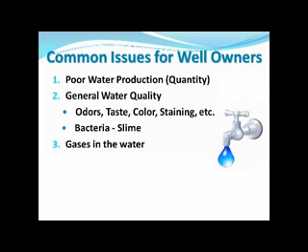Next is the quality of water produced, most noted by odors, taste, color, suspended sediment, hardness, etc. Bacteria issues are high on the list and are often related to your other water quality problems. Dissolved gases, such as carbon dioxide or methane, are much less common issues but can occur as well. You should know that no two wells are the same, including your well and your neighbor's.

Are you not getting enough water from your well to meet your needs? Does your well run dry when you put a lot of demands on it? Then you have a problem with what we call your water well's yield. Your well's yield is the rate that your well will produce water, generally expressed in gallons per minute or gallons per day. So, if I have a well that yields 1 gallon per minute and there are 1,400 minutes in a day, then I should get 1,400 gallons of water a day, right?

An average person uses about 75 gallons per day. A family of 4 would require about 300 gallons per day. So, 1,400 gallons per day should supply my average household just fine. However, the typical garden hose flows at a rate of about 5 gallons per minute.

So my 1 gallon per minute well will give me enough water for an average day, but it can't keep up if I'm watering the garden, taking a shower, or using more than one tap in the house at any given time. I need a well that does about 5 to 10 gallons per minute, or more, to keep up with typical household demand. If your well goes dry when you're using it a lot, then you have a problem with your well's yield rate.

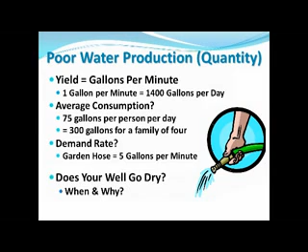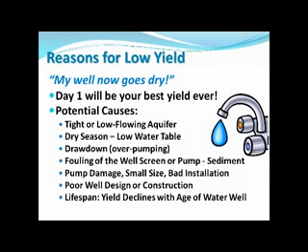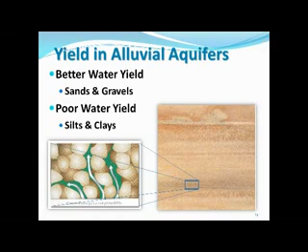In alluvial aquifers, if you have a lot of sand and gravel, these have larger open pores for the water to flow through. Now, if you have a lot of fine silt and clays in your aquifer, those will fill in these nice open pore throats and slow your water flow or yield down. This jar has nice coarse sand and gravel. You can see the water is flowing through it real easy when I tip it back and forth. If your well is built of this material, you should have a high yield rate.

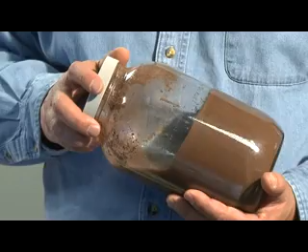This jar has some sand in it, but it also has a lot of silt and clay. I can't see the space between the sand grains because it's filled with those finer particles. So if your well is built of this kind of material, you'll have lower yield rates. In your bedrock aquifers, the water must flow through much smaller pore spaces or fractures within the rock. Porous sandstones or highly fractured rocks will produce more water than tighter shale, limestone, or coal.

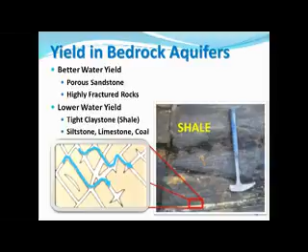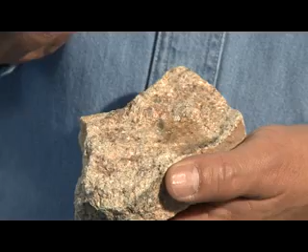This here is a piece of shale or claystone. It's made from clay that has hardened into rock. If I drop some water on here, it sits on top and doesn't soak into the rock, unless it finds a fracture to move through. Here's a piece of sandstone. You can't see it very well, but there are small pores in between here. If I drop some water on this, I can see it soaking into the sandstone, spreading out. There's pores in this rock, and the water will actually move through this rock.

This here is a block of coal. Now it looks pretty tight when you first look at it, but there's lots of small perpendicular fractures going at different angles through the rock.

So water may flow through those fractures if you have this in your well. Does your well go dry in the fall or winter? Then you are likely seeing seasonal fluctuations in the groundwater table from seasonal recharge. Spring melt and rain runoff recharges the aquifer, which then drops during the drier fall and winter months, possibly dropping below your well pump. This is more common in shallow alluvial stream valley wells than it is in a deeper bedrock well, but it can occur in both.

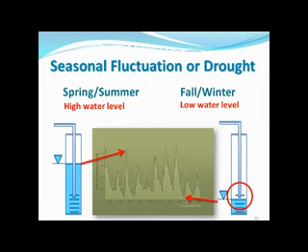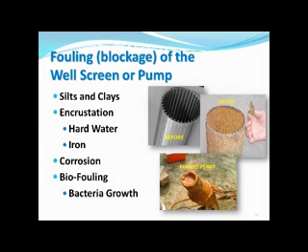So your well driller said he meets the minimum construction requirements. Does that mean you have the best system installed for your well? Maybe yes, maybe no. There are lots of options for the driller, and many of the construction rules are vague in certain areas. This leaves open for drillers a wide variety of options in terms of the quality of the well they construct.

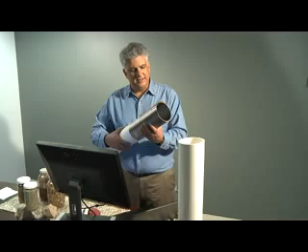Here are some common well screens that you might find in your water well. This one here is a stainless steel wire wrap screen. There's a stainless steel wire going continuously all around the casing. It's a very narrow, thin slot that filters out rocks and sand before it gets into your well. It has a real high flow capacity, and this is the highest quality screen you can put in your well.

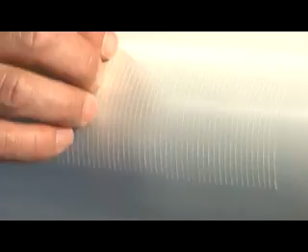On this end, I have what's called mill slotted PVC. It's similar in that it has a lot of small slots, but they're cut into the PVC directly. They're not continuous, but they still have a high flow capacity because there's hundreds of them in this one length of PVC. In addition, this pipe has what we call flush threaded joints. The pipe screws together, has an O-ring seal, and it's a very strong joint. These are both manufactured well screens, and they're very high quality.

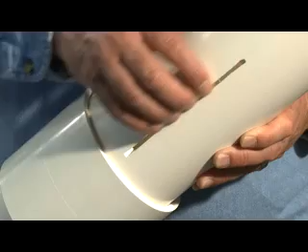This is an example of a homemade well screen. You can see here there's a large slot cut vertically in the pipe. This is just ordinary PVC pipe, and someone took a Skilsaw and just cut by hand a slot in the pipe. This slot is quite a bit larger than the slots in the other manufactured screen. It'll let larger particles in which could do damage to your pump or your well. Now that homemade well screen may last a long time before it gives you a problem in some wells, but not as long as the manufactured screen.

There are lots of other quality decisions a driller can make. He can shortcut the cleaning of the borehole, called developing the well, which removes the debris left over from the drilling and also properly sets the filter pack around the well screen. He can make the hole a little too small for the well casing. The pump may be located too close to the bottom of the well where it pulls in sediment. So the lowest bidder may meet the minimum construction requirements, but the lifespan of the well could be compromised as a result.

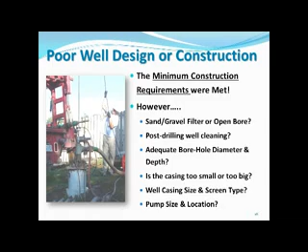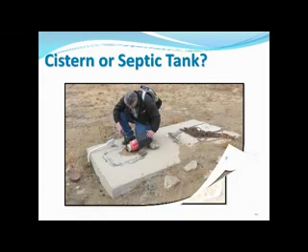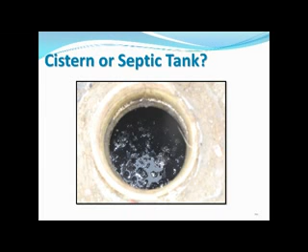Here's a look inside that vent pipe. There's lots of floating algae and bacteria growth in there. Clearly not suitable for human consumption. Yet this well can produce clean, safe water. It turns out that the concrete tank was a septic tank construction and it was being used as a cistern. The well was only 7 years old, but going cheap on the cistern the first time resulted in a $9,000 repair job.

In the next section, we'll talk about the solutions to fixing the issues we just discussed.